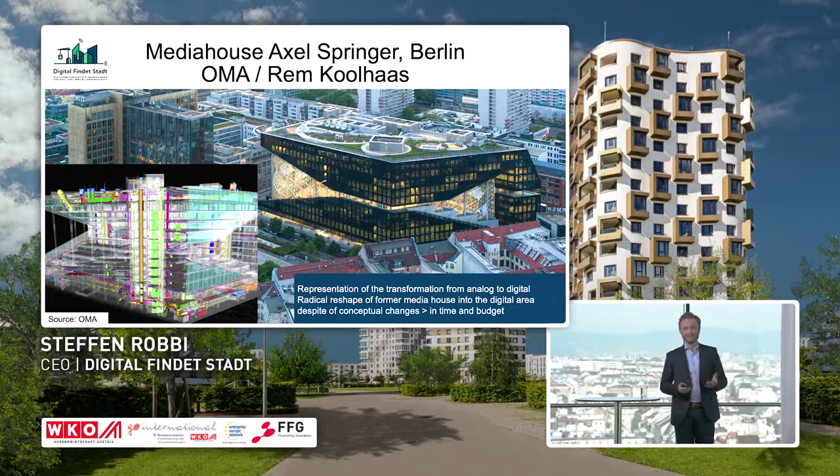He wasn't asked to do so, but he decided to use building information modeling, BIM, to be able to articulate his architectural ideas and the really challenging tasks given by his client. And he successfully finished the whole project in time and in budget, which is not standard, as you might know, in Berlin. Let's stay in Berlin and look at another example of a smart building.

Here in the Cube, close to the main station, in this 19,000 square meter area, we find 3,750 sensors and 750 Bluetooth beacons that are gathering a whole lot of data and information from the building infrastructure and from the users. There is a tool called the Brain that analyzes this data, and the important thing is that it continuously provides a growing number of services for its users. So data is not just used for controlling the building technologies, but really for the benefit of users and also for new business models.

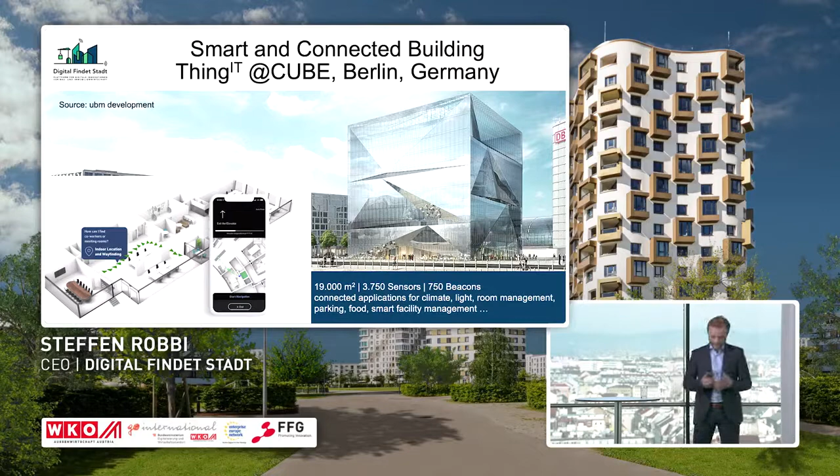There are a growing number of applications like climate control, climate management, lighting management, room management services, parking services, food arrangement, of course, smart energy control for facility management, communication tools, and so on.

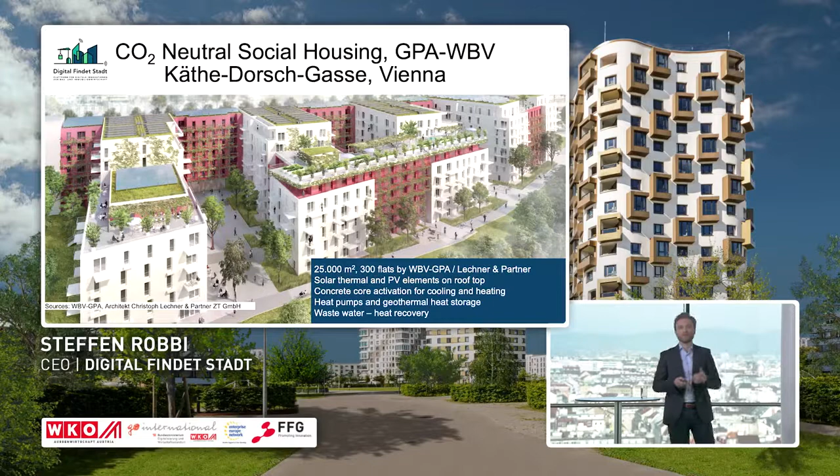And the digital model has been the core to do energy simulation, to design the energy concept, which is really a great trade-off between low operational costs over the life cycle, but also low investment costs that would fit in the concept of social housing. So I hope I could show you that digitalization really is the foundation of our future sustainable and green building environment.

And digitalization in particular means building information modeling, BIM. This is not a new fancy tool, but a common language. This is a methodology, a process, a step-by-step process. It all starts with 3D geometrical representations of our buildings. We have windows, we have doors, we have walls. It starts with the geometrical model, and more information is added in the continuity of the project.

We add information about time, when which step is necessary. We add information about cost. So at all times of our project, I can just count together how many windows of which kind, how many doors of which kind are integrated, how many masses for walls, for roofs are integrated, and I can always do the cost calculations. And that's why BIM-based projects mostly stay in time and budget and offer much more transparency than the conventional way of planning and construction.

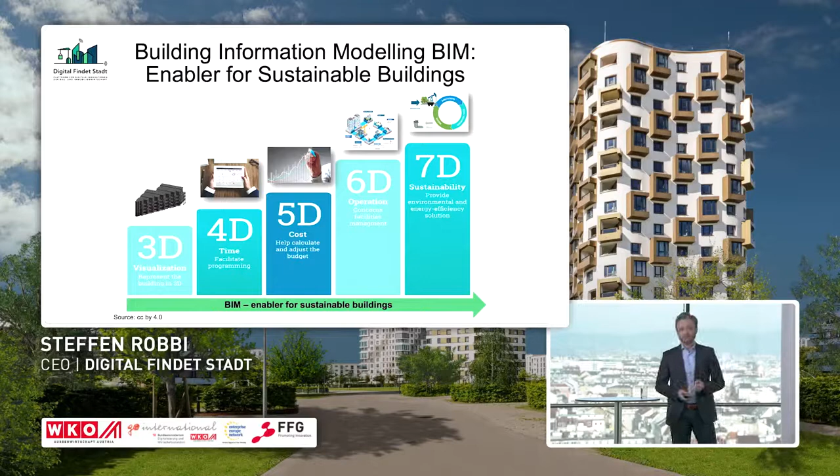But also in operation, we can add information from climate control, from energy demand to really optimize our maintenance, our cleaning processes, demand-based cleaning, energy-optimized building operation. But the most important thing is the last step of building information modeling. The digital model of our building offers the opportunity to automate energy simulations, to do a material building passport. That means that I always know which materials of which value are integrated in my building, and this really enables the implementation of a circular economy.

I just want to give you a very simple example of what that means. I think clash detection is the most common tool that is used in BIM projects. Many of you might know it. Here we see a clash of two pipes, and if that happens, the planner immediately gets a notification that there is a clash, that there is an error, and gets the ability to correct it. And with this, we save not only a lot of time, but we save a lot of waste. We save a lot of resources that we urgently need.

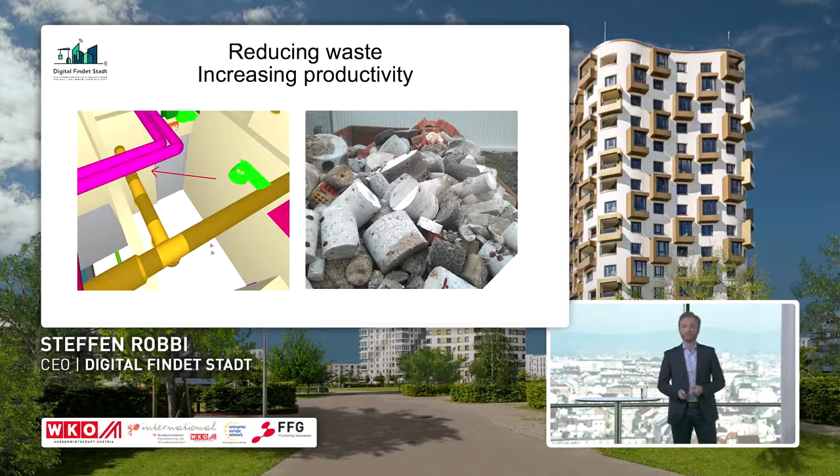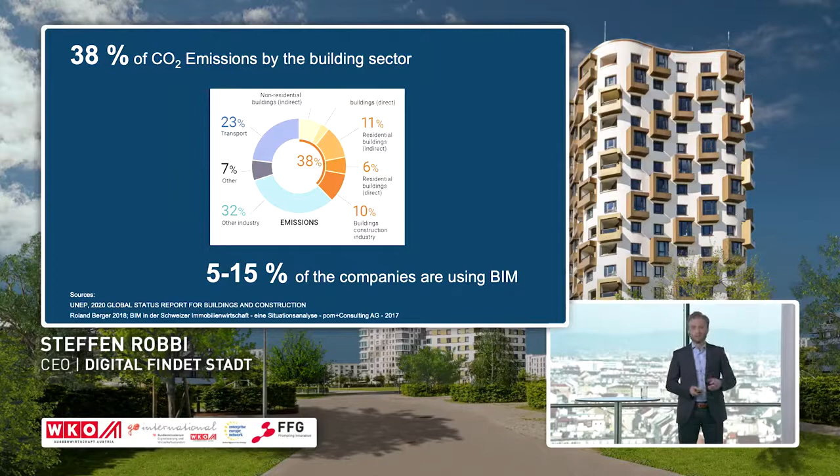We urgently need it because the building sector, as you know, contributes massively to global CO2 emissions, about 38% on a global scale. And if we have seen that digitalization really offers the opportunity to plan more transparently, to connect calculations, then it's quite astonishing that still only 5 to 15% of companies are using BIM in their daily operations. So there is a strong need to roll out this new methodology. And this need doesn't only come from a market point of view or from a legislative point of view. It basically comes from a technology point of view.

As McKinsey has shown, there is quite a new range of disruptive technologies entering the market. We see not only BIM and smart buildings, but also industrialized construction. We see 3D printing. We see offsite production. I think we will hear a lot of great speeches about that topic today. And we also see new global players entering the market with new business models, with knowledge about how to use data in the building industry, how to create big platforms, and how to organize this really complex process.

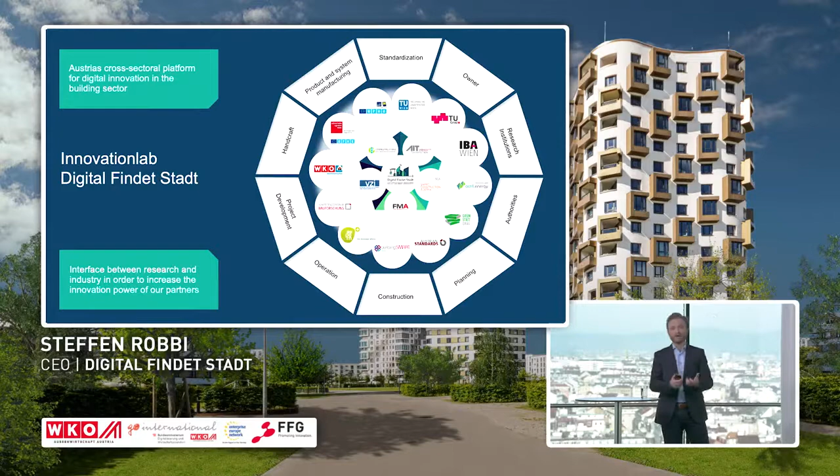So we really have to hurry up. And hurrying up is the reason why we have decided to found our company. Digital findet statt is a co-financed project by the Climate Ministry. It's an innovation lab that brings together big stakeholders from planning, construction and building operation, the Verband der Zivilingenieure, Facility Management Austria, Smart Construction, and together with the IG Lebenszyklus Bau and the AIT Austrian Institute of Technology, we have set up this project and company to really push forward to drive innovation projects here in Austria.

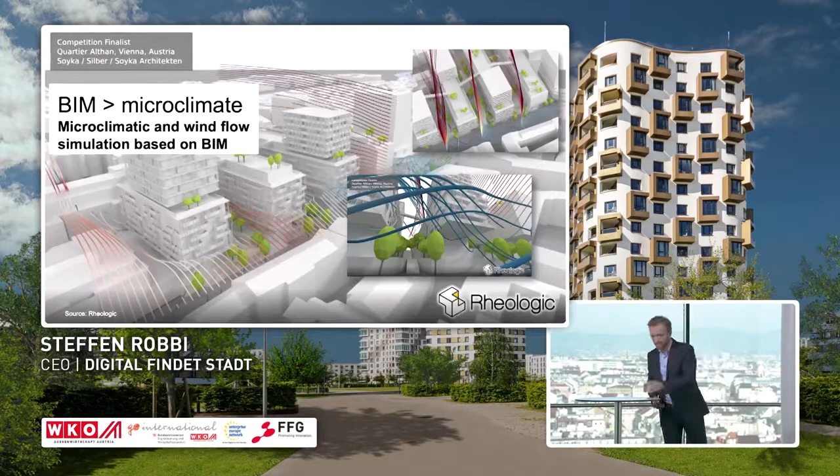So we offer a lot of consultancy services, innovation management for research projects, for technology development, but also for new innovative BIM projects. We drive and run an academy for knowledge transfer and further education, and we provide infrastructure to demonstrate new digital solutions. So we have done a lot of projects. We have supported, for example, Rheologic to combine BIM with optimized microclimate and wind flow simulations. We support the company of Delta to automatically calculate the CO2 footprint out of a BIM model.

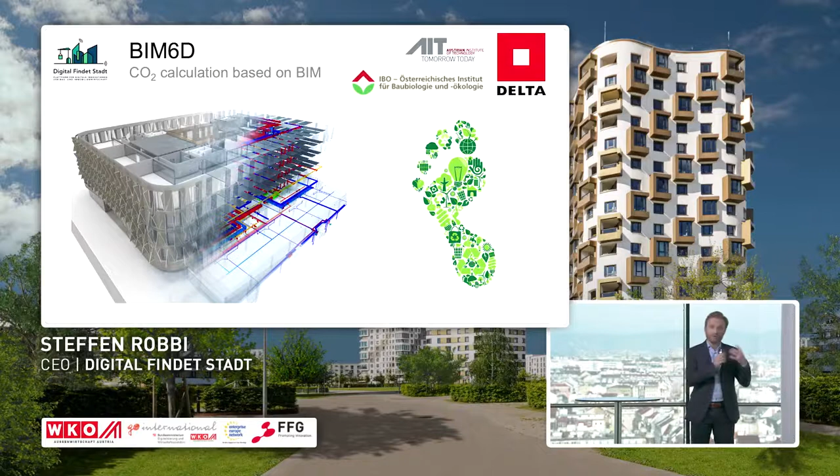But one project I'm very proud of is the so-called ASI-Merkmal server. It's the definition and further development of BIM properties for the Austrian building sector. So with this standardization process, we provide a common language here in Austria to really use and implement and work together on one common digital model. We have joined up with the AIT Austrian Institute of Technology with Austrian Standards and are supported by buildingSMART. And we don't only talk about this intention to do so, but we have already got first movers to finance these projects because it's a lot of complex work and it's really the basic language that we need here for digitalization.

So concluding, summing up what we have achieved, I think what I wanted to say is that if we want to create sustainable and green built environment, we really need digitalization and building information modeling as the foundation. But in order to achieve our very ambitious climate goals to 2040, we need to accelerate. We need to get speed to roll out BIM. We have very good standards. Austria is innovation leader with this standard I've just been talking about, the ASI 6241. And we now continue to further develop that standard. We have the necessary digital solutions. BIM is ready to go, and much more, as I have wanted to show you, is coming.

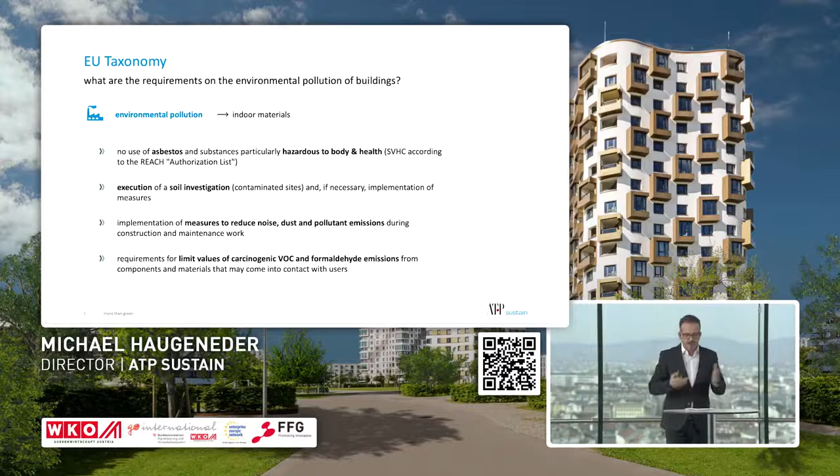What's in these 2 topics? Basically, for indoor materials, asbestos and other harmful materials are forbidden. And there are special limits for VOCs and formaldehyde. So these emissions the taxonomy will report. So everybody has to show which kind of emissions are in the building or outside the building. And one major topic is that during construction and maintenance work, it's not allowed to have other pollutions, noise and dust, to protect the neighbors.

The EU taxonomy will force the circular economy as well. So the circular economy is one major part in the European Union. And if we want to have a circular economy, we have to go to reuse and recycling processes without harmful substances. So we need different construction techniques, and we have to ban these harmful materials from our buildings. Then it's possible to have this reuse and recycling process in our buildings.

How can you get a healthier building? What are the goals? The EU taxonomy on one side, for new construction, has the goal to minimize the indoor risks and to minimize unhealthy environments for the future. And for existing buildings, to show which kind of materials are in the building and to work on a management plan. So to look at which materials are in the building and how I can solve these problems for the future. Those are the major parts of the taxonomy and these green buildings.

So I think the EU taxonomy is a new tool that we have to use in the real estate market to show these qualities of buildings. And when we show the different qualities of buildings, I think the real estate market will change their philosophy of how to build buildings in the future, and look more at these substances and materials and build better buildings for the future. Thank you.

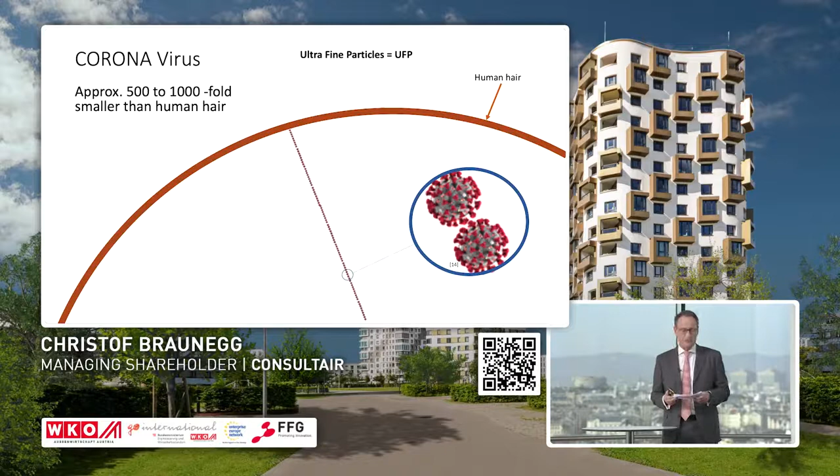We present a solution which reduces all kinds of small particles, including the SARS-CoV-2 virus, from the room air. Because of their sizes, viruses like SARS-CoV-2 belong to the so-called ultra-fine particles, particles which we call UFP. These small particles are about 500 to 1,000 times smaller than the human hair.

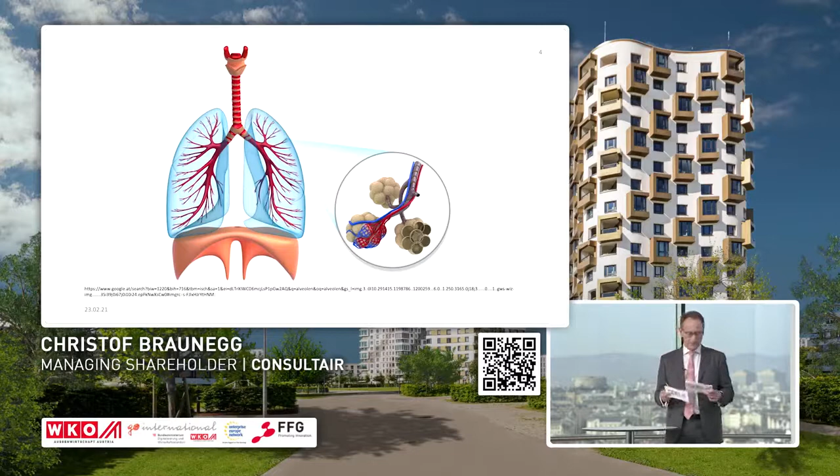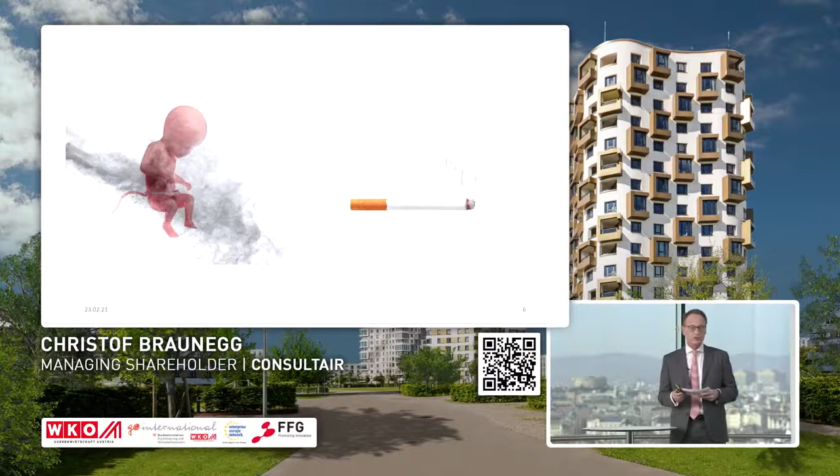These ultra-fine particles, or UFP, are very dangerous because they enter through the lung barrier, our bloodstream, and get into every part of our body. But UFP can also enter the brain directly through the olfactory nerves, enters the human fetus via the mother, and according to the World Health Organization criteria, UFP is classified as more dangerous than cigarette smoking.

There are more than 400 scientific studies proving the health effects of UFP on the human body, including allergies, asthma, headaches, lung diseases, tumors, heart attacks, Alzheimer's disease, and many more.

Meanwhile, we all know that to fight the spread of COVID-19, the social distancing of 1 meter or even 2 meters might not be enough, as the virus, like all UFP, is so small and so light that it floats in the air for a long time. In fact, COVID may float in the air for 72 hours until it drops to the floor.

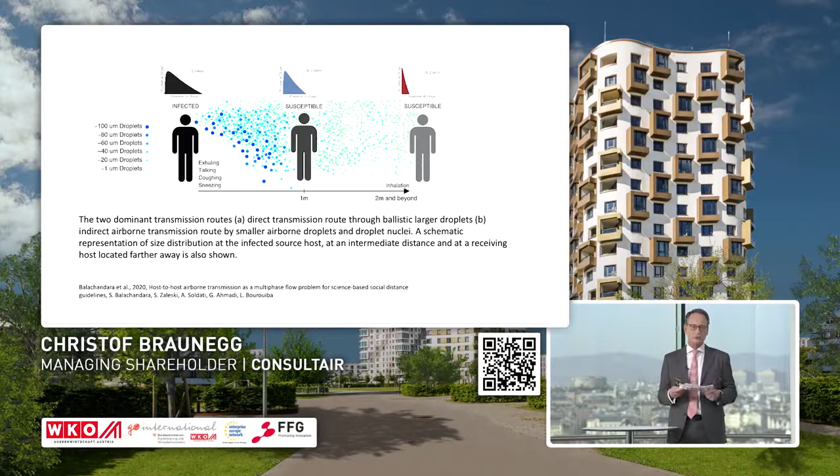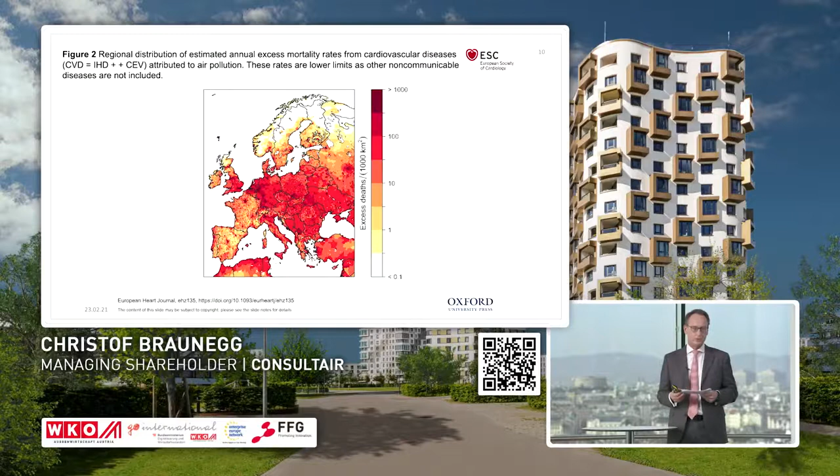The sources of UFP may be from nature through volcanoes, but most UFP is produced by man from state-of-the-art combustion engines, industry processes, and modern braking systems, just to name the most important ones. And we can't really protect ourselves from UFP either, unless you live at the polar ice caps. So what can be done? How can ultrafine dust in the air and viruses be prevented in the room air?

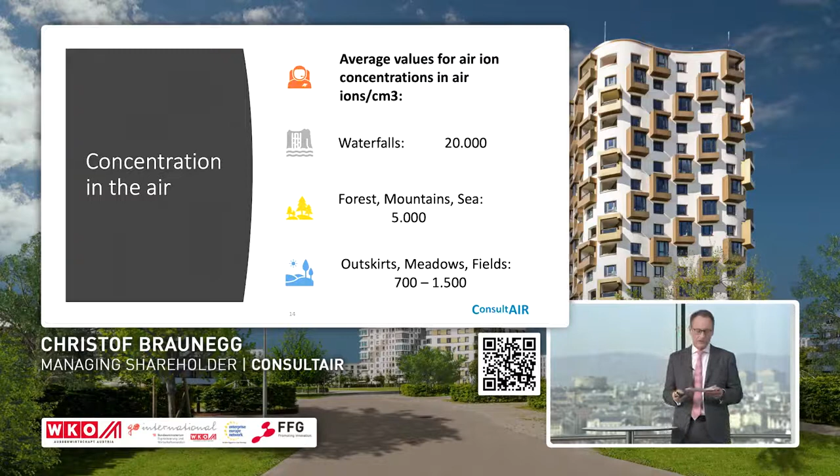Well, in fact, the best strategy is to use the one nature is using. Nature has its self-purification strategy for the air, which are essentially small atoms and small molecules which are negatively charged, which we call air ions. Nature produces lots of these air ions in waterfalls, rivers, waves, during thunderstorms and other natural effects.

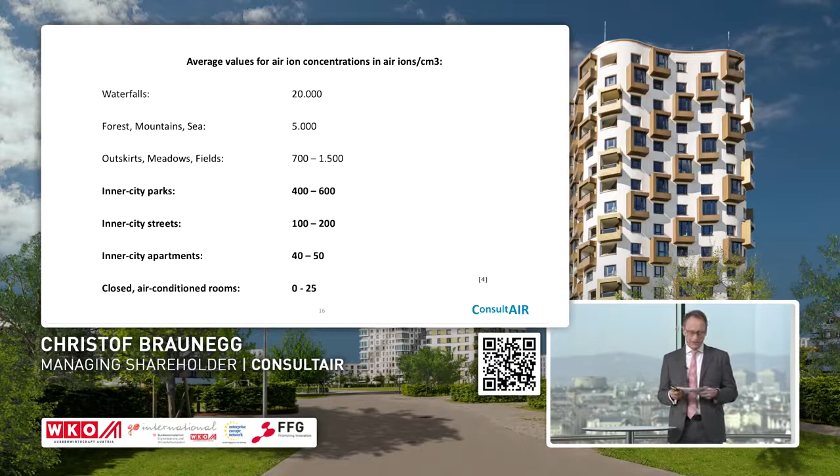But unfortunately, air ions are reduced because of plastic, fine dust, smoke, and ventilation systems. That is why in the inner city areas, there are hardly any air ions left. But air ions are very important because air ions can reduce UFP due to the negative charge, which leads to a so-called agglomeration or clustering of the ultra-fine particles.

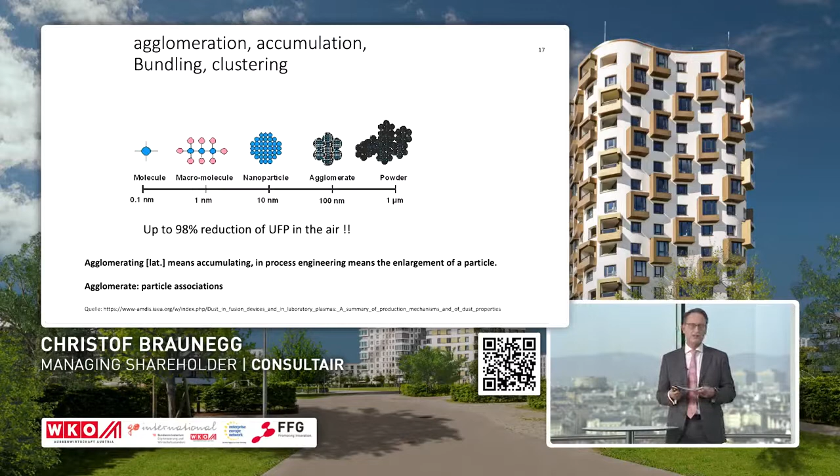And the particles become larger and then heavier and fall to the floor and are less easily breathed into the lungs. The effect of the particle reduction of up to 98% can be measured, and therefore also the danger of being infected with viruses like SARS-CoV-2 through the secondary pathways is greatly reduced.

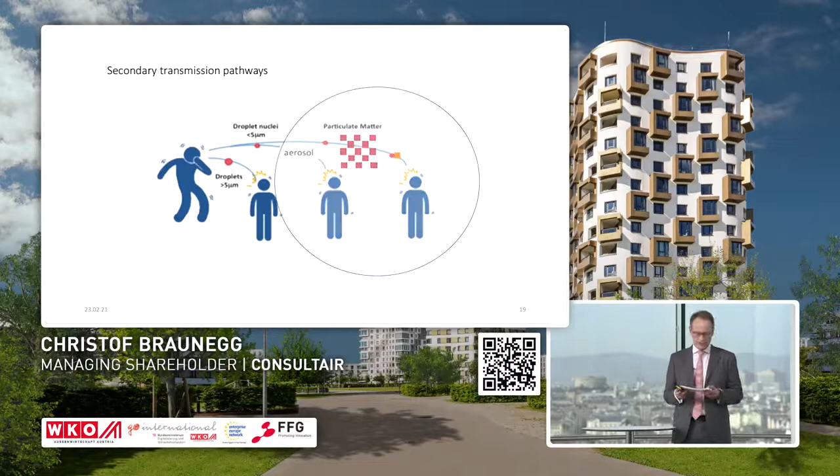Besides this very important effect of reduction of particles, VOCs, formaldehydes, allergens, terpenes, air ions have two further big advantages. Nearly 200 scientific studies describe the positive effect of air ions on human health, like a proven 10 to 15% increase in mental health and physical performance.

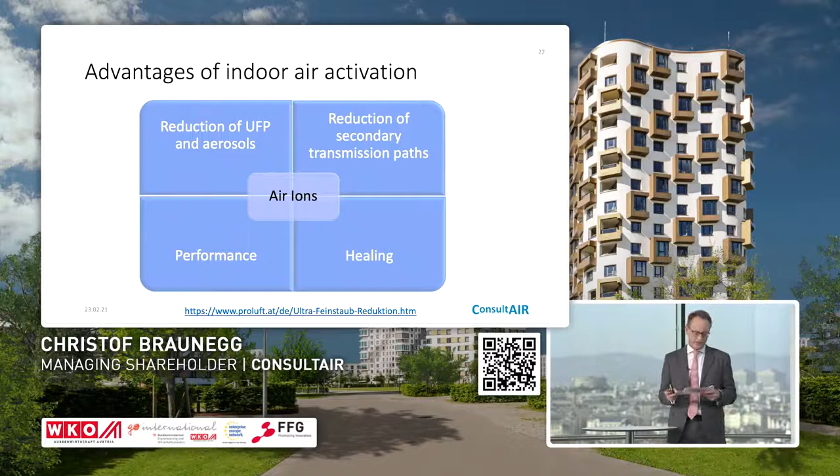And the fourth major advantage of air ions in the air lies in the healing effect for tumor patients, which was discovered for the first time in 1940 already, and was since then scientifically proven many times. There are several examples where this effect is demonstrated.

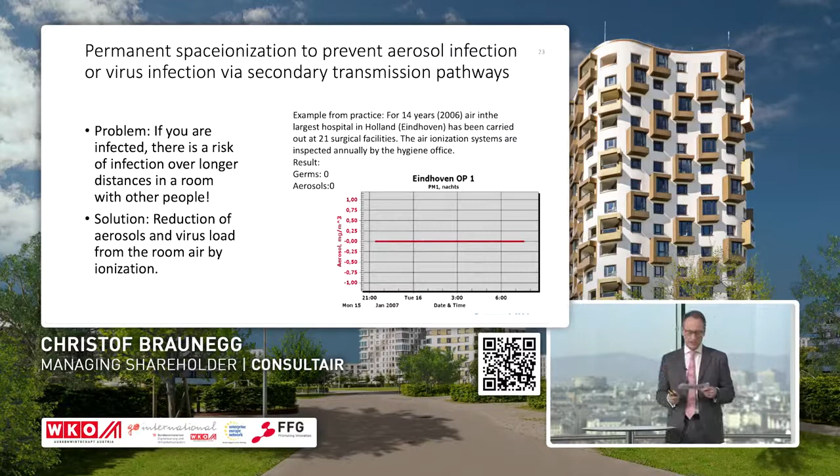Here's an example from a hospital in the Netherlands, where since 2006, room air activation systems, as we call the systems, have been installed in 21 OP rooms, and the aerosol load of the room is measured every year. In this diagram, the result is shown: germs and aerosols in the air, 0.

Another very recent example was installed in the Opera in Chemnitz, Germany, and there are many more references proving the healthy effect of air ions in the room. Even the most innovative car manufacturers are using this technology today.

The air activation system Pro-IO consists of various components, and the capacity and number of the components depend on the ventilation system it is built in. Finally, here's an example of how the components of an air activation system are built into a ventilation system.

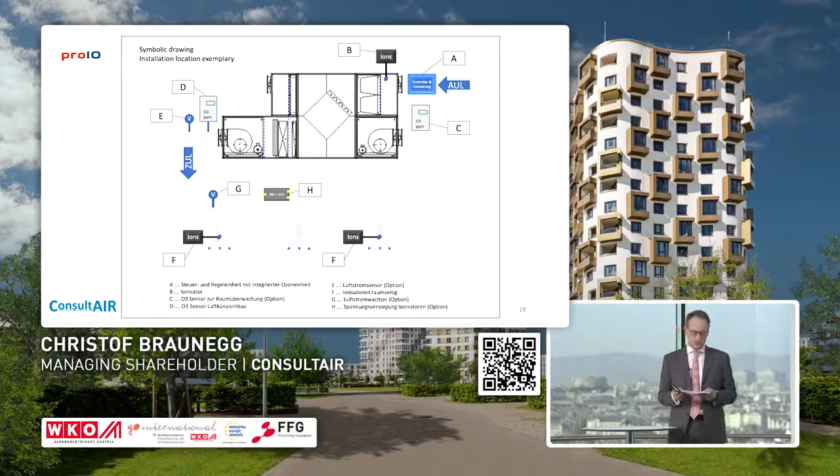Thank you, Mr. Braunegg. A look to the invisible parts of the air, but with their hazards on our life. Is it possible to filter out these parts also with normal filters in the standard and the regular ventilation systems? Well, unfortunately not, because filters, even high quality filters like an F9 filter, as we call it, filter only particles up to a size of 0.2 micrometers. All the particles which are smaller cannot be filtered. And for example, the SARS-CoV-2 has a size of 0.12 to 0.06 micrometers, so much smaller than that.

And there are some other systems also on the market. And what is the difference to the standalone devices and your Pro-IO system? Well, our system is working with the ventilation system which is already installed, but it is not changing any performance of the ventilation system. And the standalone units, as the name says, are completely independent, smaller units which are in each room, and they only treat the air of each room. And there are many products on the market, but only few are very good. The good ones need a lot of space. They are heavy usually, and they need a lot of changes of filters.

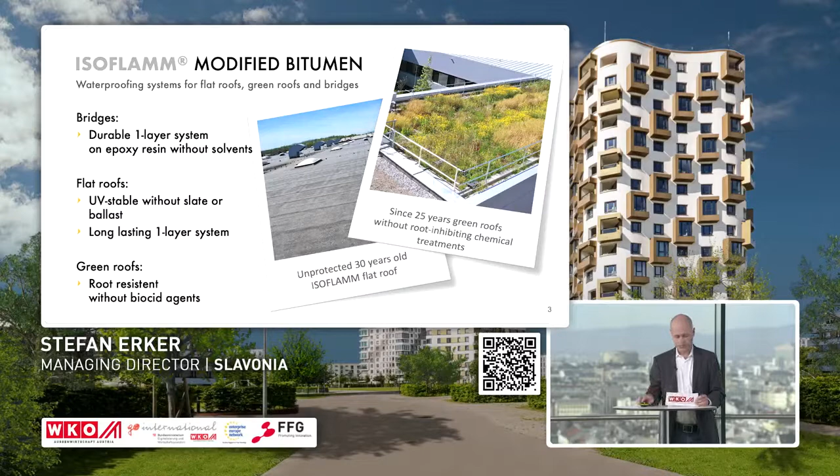For green roofs, there is an additional requirement that the waterproofing membranes have to be root resistant. Slavonia offers since 25 years the first and only root-resistant bituminous waterproofing membrane without chemical treatments for extensive and intensive roofs. Our next division is our SPIDI Fixing System. SPIDI is a certified metal subconstruction available in corrosion-protected steel and stainless steel. The SPIDI brackets are available in lengths up to 900 mm.

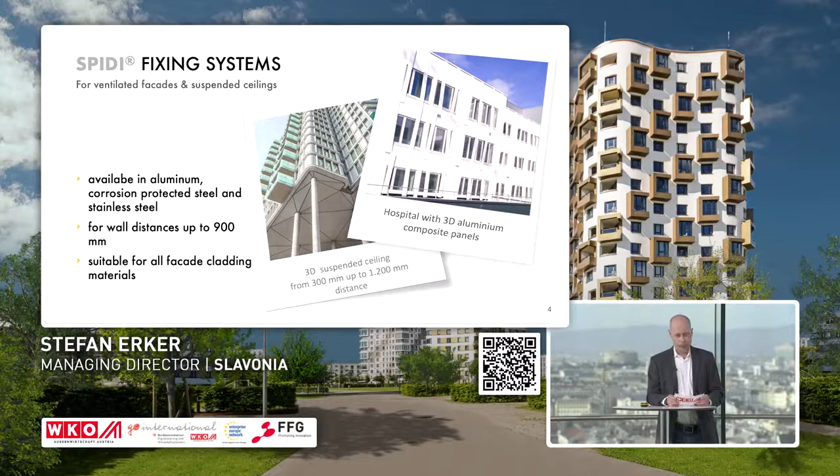On the photo you can see a 3D suspended ceiling, which was realized with special lengths on a high-rise building on stilts. Also on the facade, 3D shapes can be easily implemented, as you can see in the right photo. And all kinds of cladding materials can be fixed with the SPIDI facade system. Static calculations and building physics are also part of our service. Here you have further application examples for the SPIDI facade systems.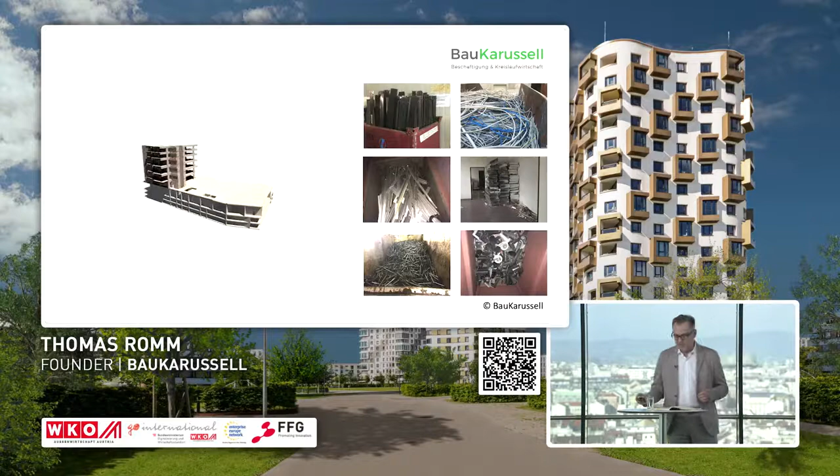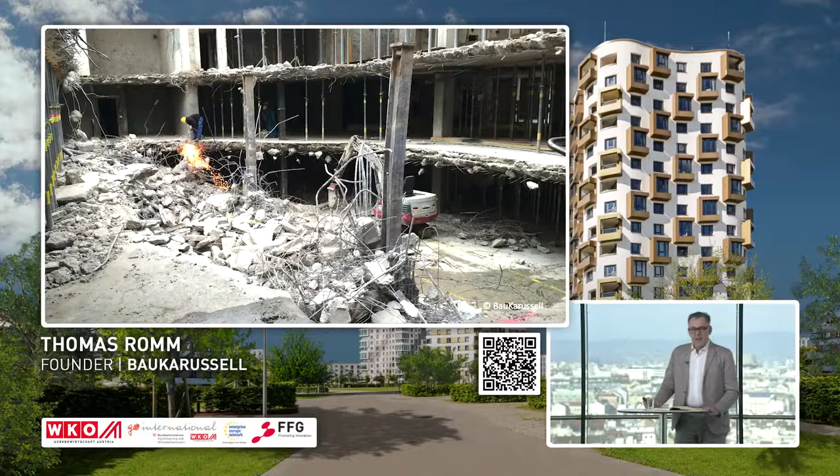We create urban mining concepts to recover what usually gets lost. We locate, collect, and sort these valuable and precious resources during the demolition phase. And of course, you might say, metal is collected anyway on the site. But I can tell you, the contractor has no manpower to collect and sort these precious non-ferrous metals, or even to prepare building components for reuse. And this is what we do.

We are doing social urban mining because we have the manpower with social enterprises who work for an added value in the deconstruction of buildings. This added value is generated by recovering materials, precious metals like copper and aluminium, and its revenue is exchanged for work of social enterprises, for preliminary dismantling work on the project.

And third, last but not least, we are offering to reuse or to prepare for reuse building components that we can regain in these objects. So social urban mining integrates social business in circular construction. Baukarussell is social urban mining. We even invented the word. Let me give you an example.

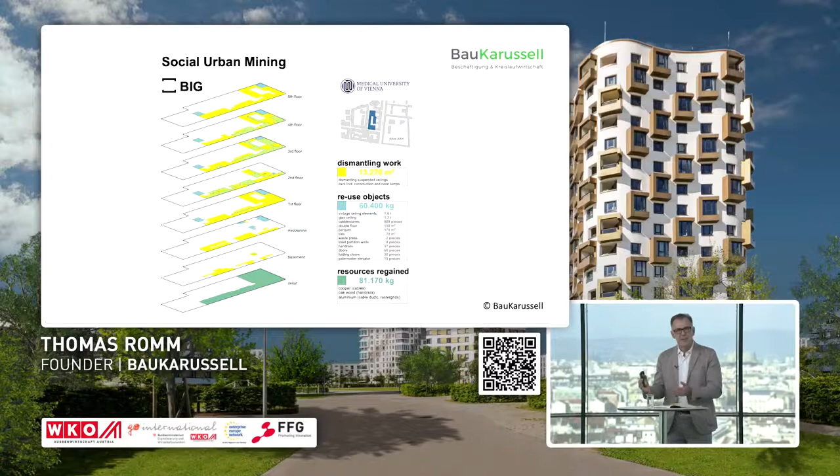A simple example of a recent project we did for the BIG, the Bundesimmobiliengesellschaft, the biggest player in Austrian real estate and construction. In the planning phase of the medical university in Vienna's 9th district, we had 1 year to recover almost 100 tons of valuable, precious resources and about the same amount of reusable objects. So the client saves time for the demolition phase afterwards. He reduces waste and he invests all these revenues with a social impact.

So these are our social urban miners, our local partners, which we connect to the construction world. Baukarussell is combining and connecting employment with circular economy. And therefore, there's an enormous impact, a social impact and an ecological impact. Thank you.

Thank you for your impressive presentation, Thomas. I have spontaneous questions about it. How do you discover all these building projects? Where do you find them? Oh, the projects find us. Baukarussell is quite popular.

Well, most of what you do really takes a long breath. What is necessary so that you can continue on the path you have successfully started? And what kind of help would you as a pioneer want to be offered? Well, beyond the legal framework, which is necessary to have more continuous work in this field, we need the engagement and the encouragement of our clients, of the big real estate owners. Well, I think you have also been very successful in finding these clients.

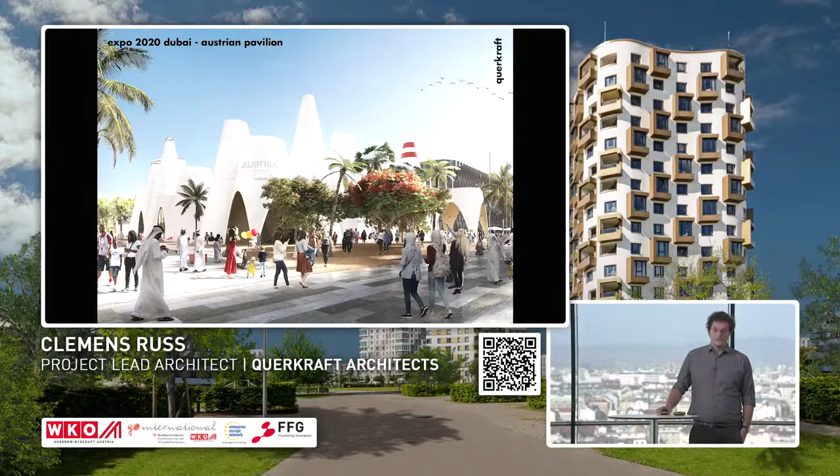Our office is also very proud to be the general planning team, and I'm proud to be the lead architect, for the Austrian Expo Pavilion at Expo 2020 in Dubai, which was postponed by one year and will be opened this year.

Let me showcase with the next slides the four aspects that we identified over the last 23 years, like an attitude that guides us through design processes that decrease the amount of resources used. The first one is operative sustainability. Two thirds account for cooling, heating, and lighting. So for the Austrian Expo Pavilion, we thought global and acted local.

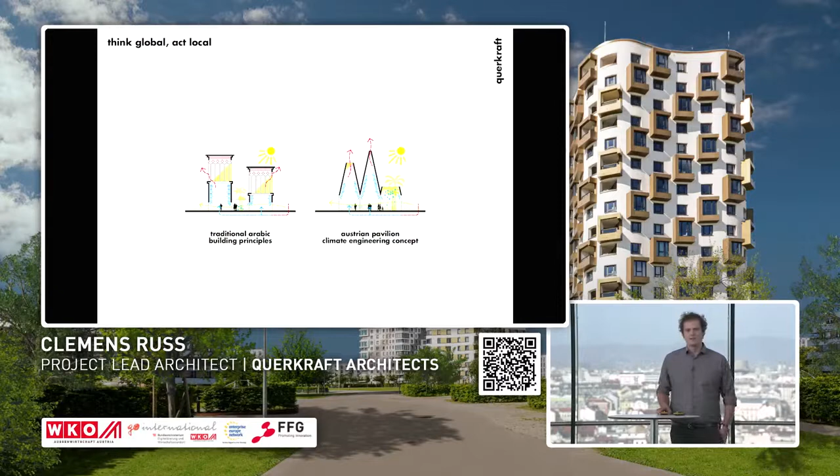We went into dialogue with local traditional Arabic building principles and tried to implement them within our design. What does it mean? We're using shading, natural ventilation, thermal massing, and adiabatic cooling to decrease the amount of energy consumed tremendously. With our partners from Ingenieurbüro Jung, we tried to identify those measures and acted low tech and high intelligence.

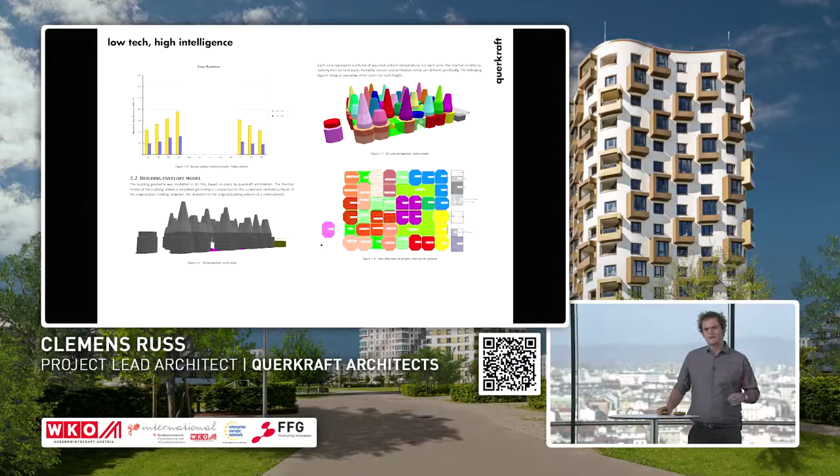That means we identified those measures, increased them, and the output in the end was that, compared to the ASHRAE standard, which is the comfort guideline, we were able to show that we are reducing our total energy demand by 70%.

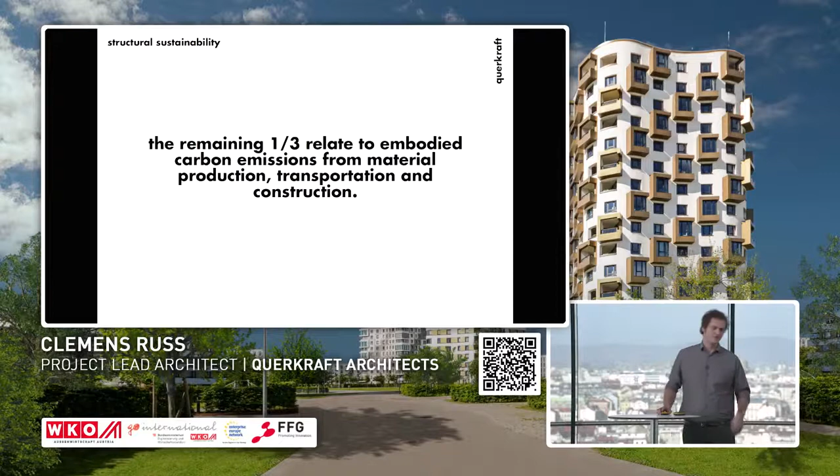The next big aspect for us is structural sustainability. The remaining part, like what Romm said, the carbon emissions are within the material, the production, the transportation, the construction itself. So what does it mean? We have to provide systems, and we have to prepare our structures to be more sustainable, to be more adjustable and adaptable for the future generations and the requirements that future generations will have.

We did it at the Austrian Expo Pavilion with precast elements that were detachable, and we're using them in another setting. That means we try to extend the lifetime and the life cycle of a project. And that's for us the big aspect, functional sustainability. We need to address those requirements of future generations. Our structures are prepared already. So our Expo Pavilion was prepared to be reused.

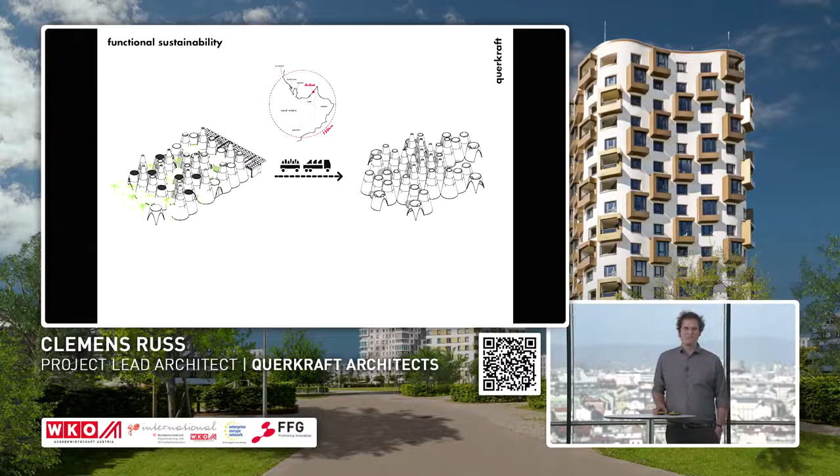And that brings me to the last aspect, emotional sustainability. It's designing products that you love the most. So we try to extend the lifespan of our products as much as possible. Things that you love the most will be handled with care, will be treated with care. They last for decades, or they last for centuries, as you see. And that's the same thing that we try with our architecture. It will not be torn down.

Let's say Expo is a half-year event. We really tried to give it a long life cycle by reusing it, and we really try to extend our circle by giving emotionalness, dramatic rooms, even fun. Architecture can be fun and loved as well. And that's something we try in all of our projects, to implement sustainability in all of those functions: functional sustainability, structural sustainability, emotional sustainability, and of course, the operative sustainability. Thanks a lot.

Well, me too. I love clay, earth, and mud very much. Clemens, thank you for sharing these exciting pictures with us. They show perfectly how your pavilion for Dubai combines traditional elements of building in hot and dry climates with innovative construction methods and ecological materials. This is a hot ride indeed. So, may I ask you two questions about your work and especially future aspects of your work. Firstly, what are your learnings from this challenging project?

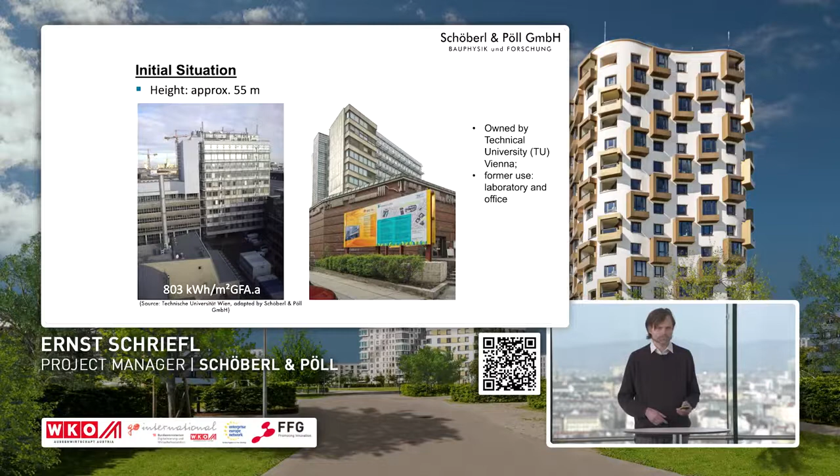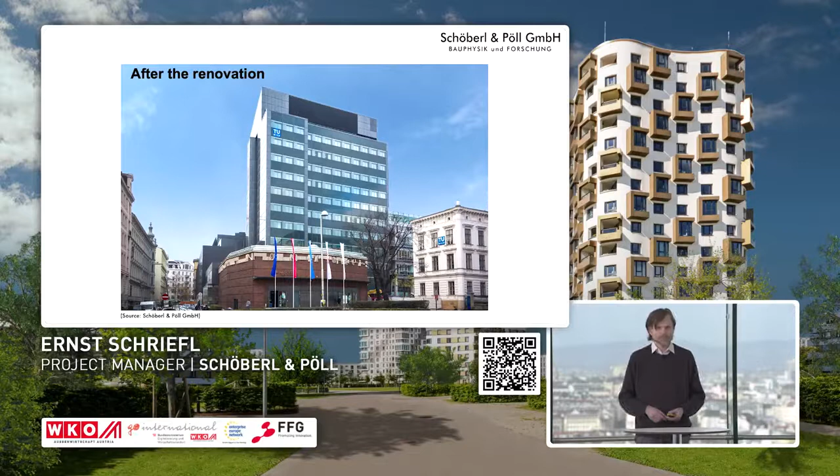And here is the picture of the building after the renovation. You can see the outer appearance obviously changed a lot, but also many changes took place which cannot be seen at first glance that well. And these changes in total fulfill that the building achieves the so-called plus energy standard. Plus energy means in this context that more energy is produced on the building over the course of 1 year in comparison with what is consumed inside the building. Consumption for uses like heating, cooling, ventilation, lighting, but also electric appliances are taken into account.

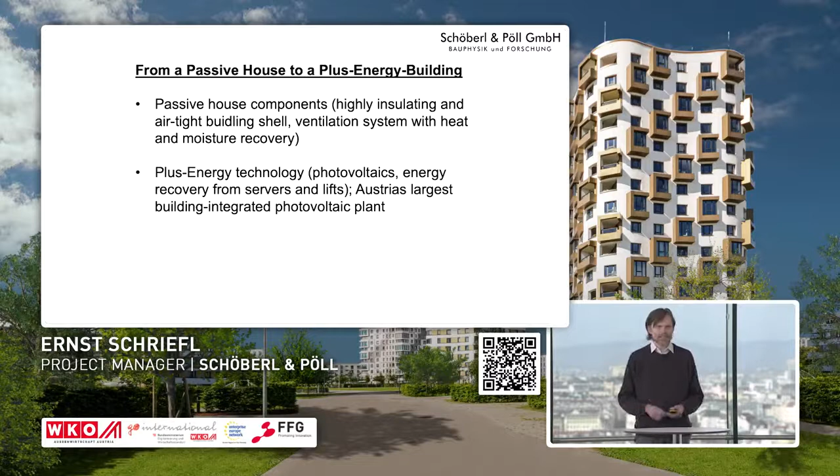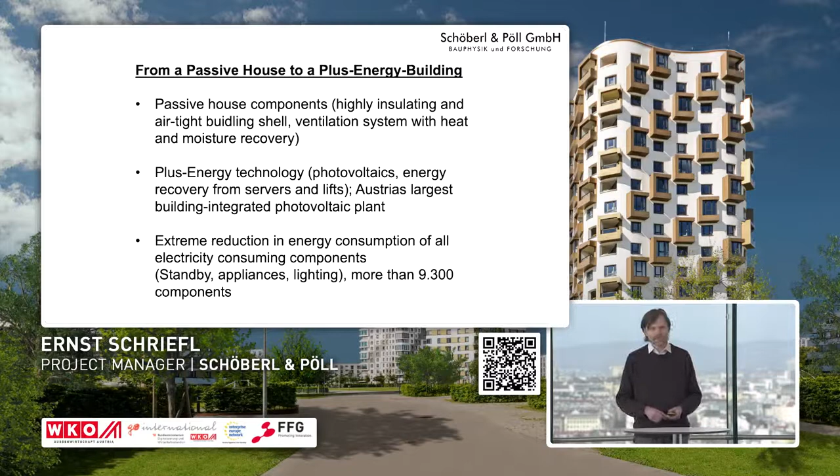So how is it possible to reach such a good energy standard for a building like this? The first thing is that the building shell has to be really excellent regarding insulation and airtightness. So it's a passive house compatible building shell. But then the plus energy technologies are added on to this. Mainly it's photovoltaics, but also energy recovery from servers and lifts in this building. And last but not least, very important, is to achieve an extreme reduction in energy consumption for all kinds of usages, also regarding all the appliances used in the building.

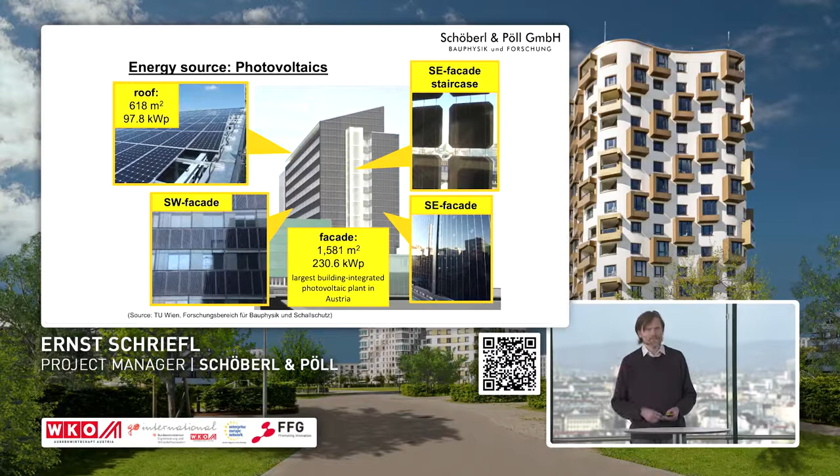So here you can see the photovoltaic modules, the plants, installed on the building, not only on the roof, but also on the southwestern and southeastern facades. In total, this is the largest building integrated photovoltaic plant in Austria, more than 300 kilowatt peak power.

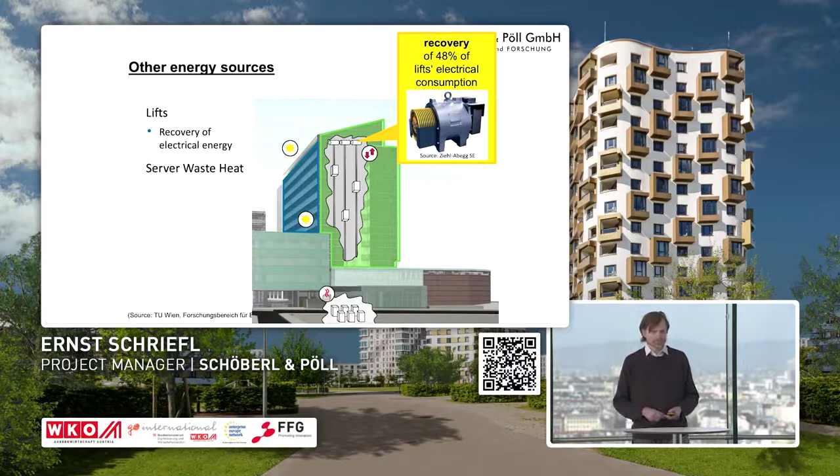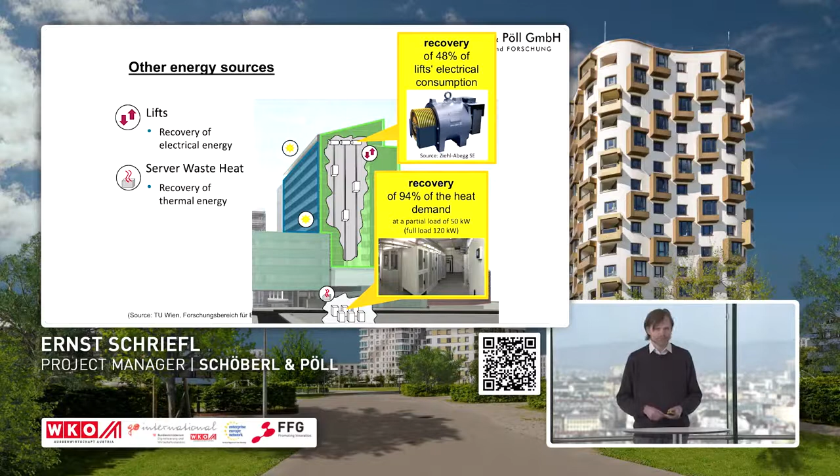So the other energy sources I already talked about. There's recovery of electric energy from the lifts, the elevators, and also from the servers. There are server rooms. The waste heat is used for heating, and this contributes largely to the heating demand of the building. So here you get an overview on all the energy sources, something I already talked about, so I just jump over this quickly.

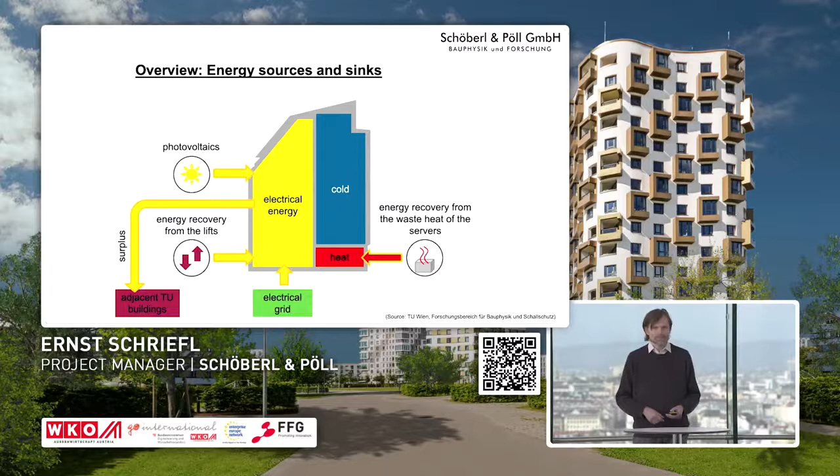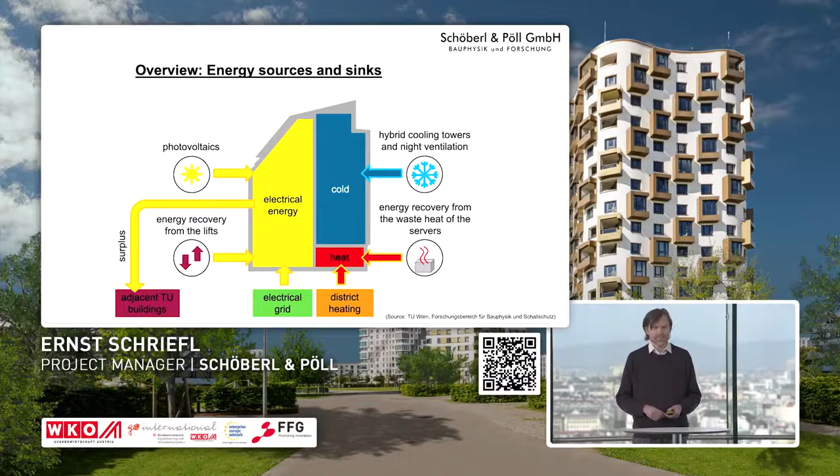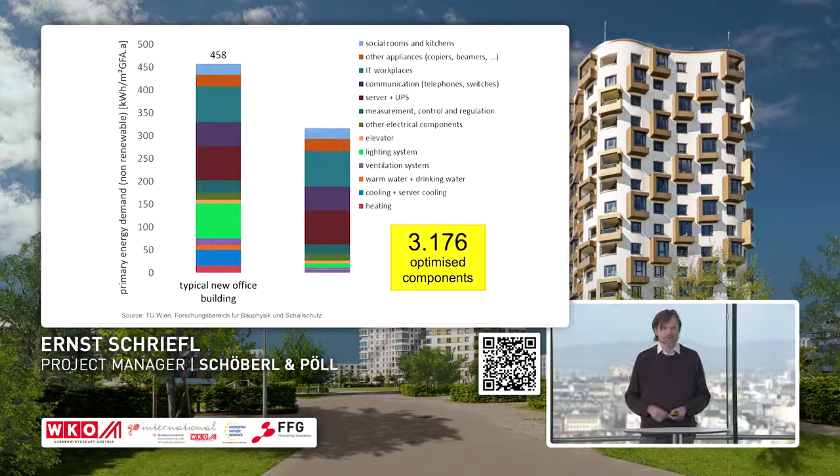So what I want to mention here is also the automated night ventilation. It means that during night the building is cooled by natural air. And here, as I already talked about, it's very important that the energy demand is reduced for all usages, for all components. And here you can see in this graphic what all was done regarding components. So for every kind of usage, components were optimized, and in total 9,300 components were optimized to gain this really very low energy demand of the building.

And here in the next slide you see a comparison. On the left, you have the building before the renovation, very high energy consumption. And then the next is a typical new office building, also quite high consumption. And then the building, how it's implemented in the Getreidemarkt with all these optimizations. And on the very right, you have the production side. This yellow is the column which symbolizes the photovoltaic production, and the red is the rest from the server and the lift. And you can see production is more than the demand, which gains the plus energy standard.

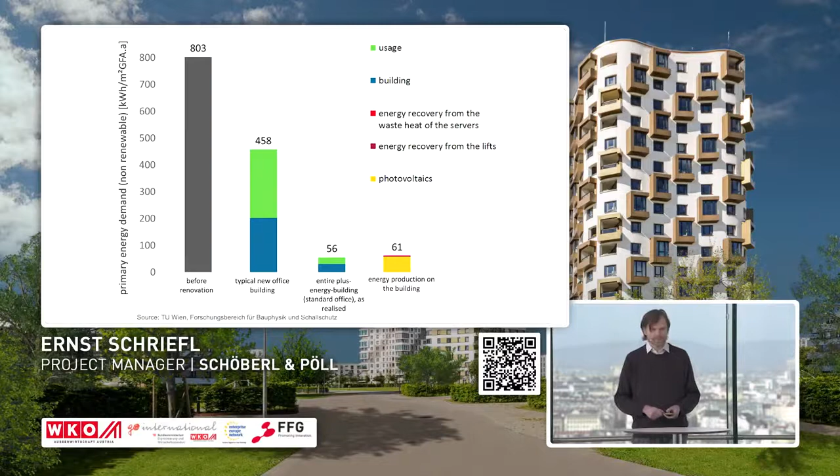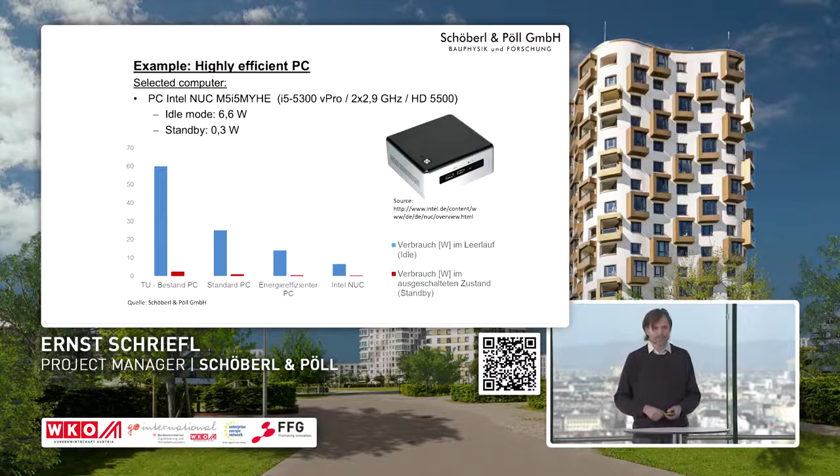And then last, I want to show just one example about energy efficient devices like these small computers, this Intel Next Unit of Computing.

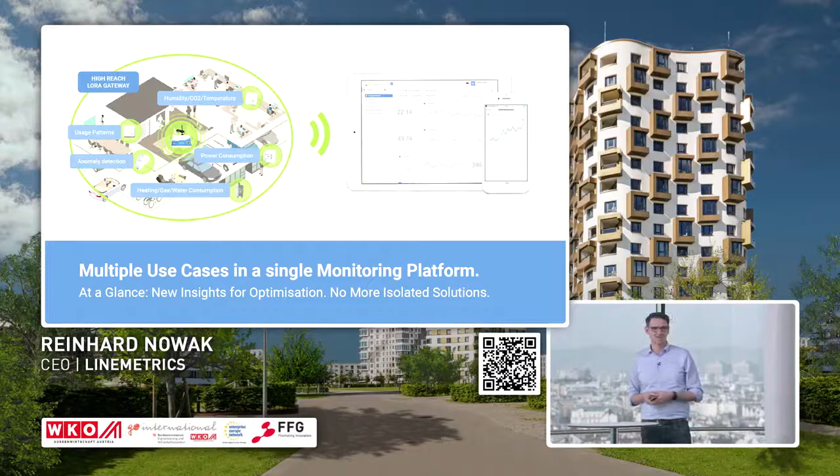Thanks a lot. Thank you very much for this introduction. So, seems like low-tech is possible in the high-tech. You're coming from the automotive industry. Do you think there are some compatibilities in this field? So can you compare something?

So I think automotive is one of the most digitalized and optimized industries, and commercial real estate is not. So I think we can learn a lot about how to optimize processes and things. But still, I was an IT guy in automotive, and the lesson I learned is that if we need a huge IT project to connect the building, it will never scale out. It needs to be simple and plug and play. I think that's something we can learn from other industries.

Thank you. And you brought some use cases. So which one do you think will be the most used in the future? So currently we see a lot of requests in the market for everything which is COVID and air quality related. But I'm still a huge fan of sustainability, and I'm 100% sure this will be the driver over the next couple of years. Very interesting.

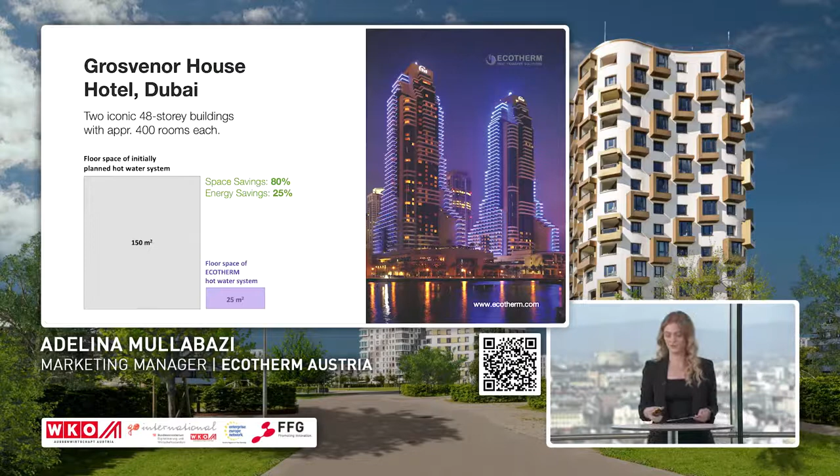This technology I talked about in the solution is our high-capacity water heater with our patented shell and tube heat exchanger. For one, as you can see on the slide, the compact design saves a lot of space in plant rooms, and the technology behind it saves a lot of energy and reaches maximum efficiency.

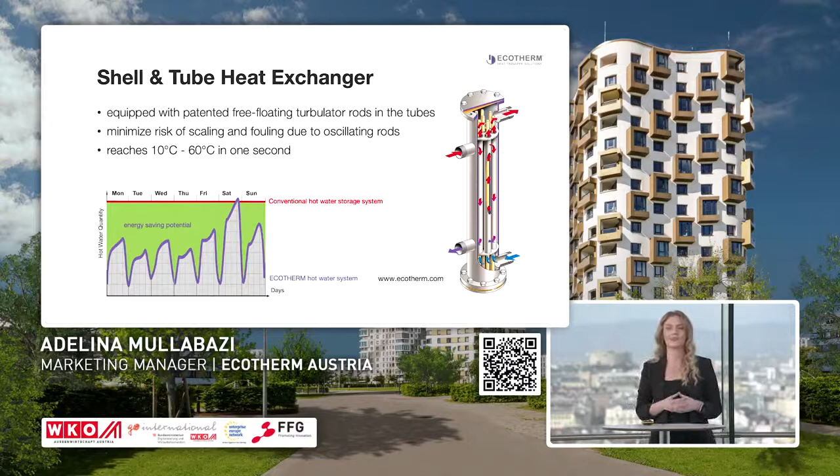Last, I want to talk about sustainability, because Ecotherm's production facility is now almost 100% carbon neutral, and we use sustainable materials only. All our water heaters are made of high-quality stainless steel, which is the most hygienic material. It does not require additional lining, painting, or enameling, and it can be recycled 100%.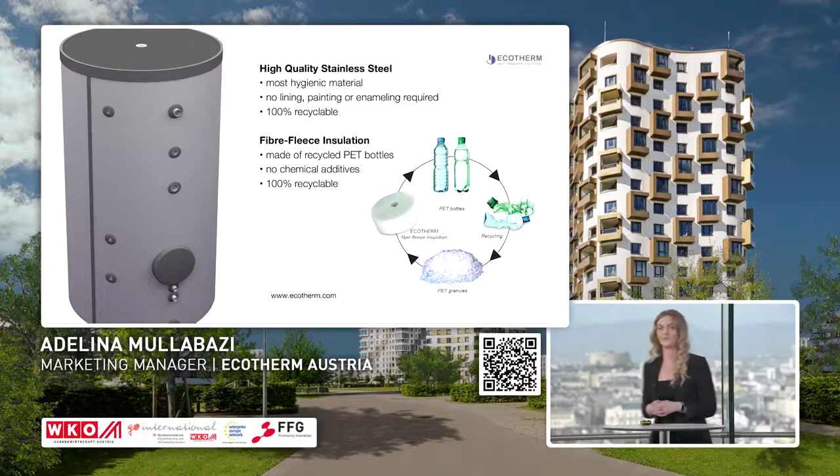Thank you very much for this insight into your huge company. You're an international company, and I'm sure you're used to traveling a lot and to leading personal meetings. So how do you now handle this current situation because of these travel restrictions? Well, first of all, personal meetings are valuable and important, of course, still, and not so easily replaceable. But in times like this, with the travel restrictions, we now offer complete project management virtually, starting from the design stage to production, testing and commissioning, and maintenance and after-sales services.

Okay, so do you use some other tools to demonstrate something to the client, for instance? We do. Actually, just last month, we completed a project in the Netherlands using only online software and virtual reality, with no personal meetings during the entire project. Ecotherm creates virtual reality models of each system to ensure better support. And of course, in the long term, it's also better for the environment. Thank you very much. So we have a future.

Thank you. Okay, then I want to warmly welcome our last guest in this session. We are turning to architecture and to materials innovation. We want to welcome now Ferhat Can. He is architect and project manager at CREE in Vienna. The focus is on materials, and he talks about an eco-friendly and visionary way of building in a timber hybrid way. So how is it possible to build a 100-meter high building?

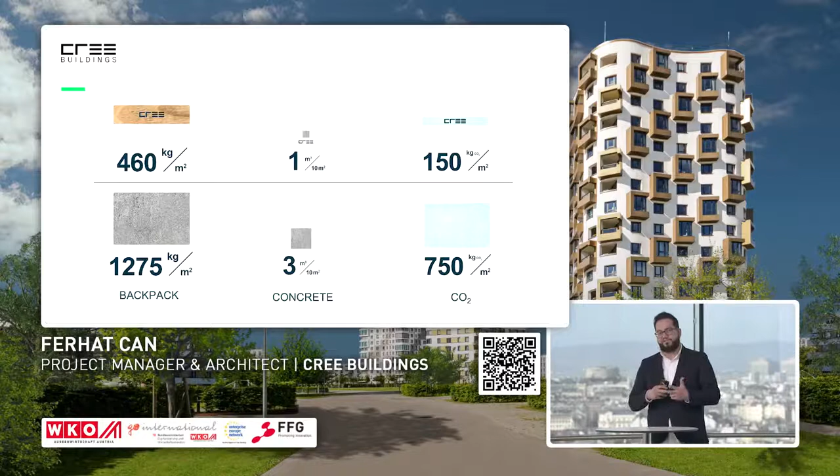Here you can see the comparison between a CREE building system and a conventional office building. And reduction is a key element of our approach. And so we avoid prototypes and reduce complexity through standardized solutions. And so we have the reduction of gray energy, CO2 emissions, and also the weight of the whole building to 1/3. And so we are focusing on low-tech buildings.

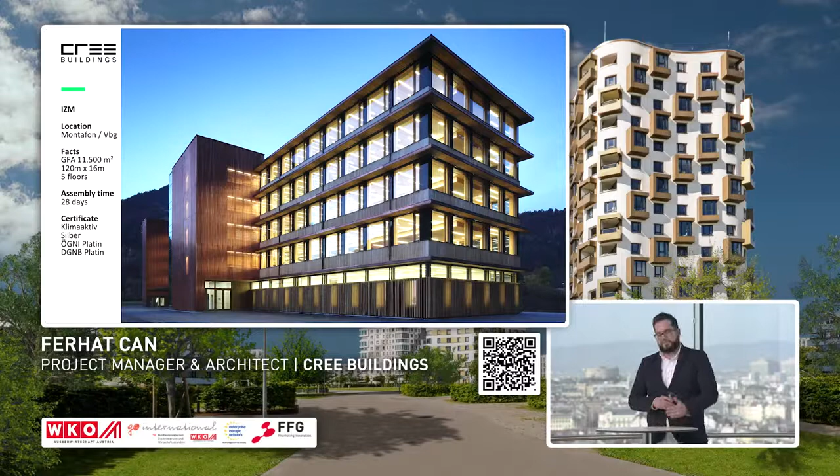And so in this wood environment, the productivity increases by approximately 5%. And also the days of absence due to illness will be reduced by approximately 2 days per year per employee. So that's also a great benefit of the system. And that's because we know wood is a warm, living and sustainable material. And so that influences human health positively and productively due to its characteristics.

And so my last point here is that timber is a material of the future. And we are convinced that we are well equipped for the future with the system. And so we believe the way forward is together, let's share ideas, collaborate, and build more sustainable projects. Thanks.

Thank you very much for all this data. That was very interesting. What is your corporation's vision for the future and for prefabrication? What is your kind of approach here in this field?